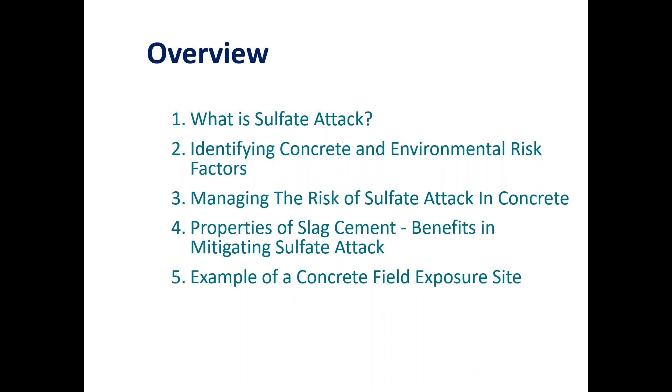I also want to try to help you identify concrete and environmental risk factors, manage the risk of sulfate attack in concrete, and then get into some of the properties of slag cement and some of the benefits of mitigating sulfate attack. I thought it would be good to close with a few examples, specifically some exposure site type of stuff. If you're not familiar with that, I'd like to introduce you to this concept. Next slide.

Okay, so all the time I spent on this presentation trying to unpack the content, to rearrange the content and spell it out clearly, this was probably the slide I struggled with the most.

I looked at various publications, including things from the PCA, the SCA, various professors, industry people, and there is a common theme in sulfate attack, but the definition I thought was best is this sentence you see at the top.

Essentially, it explains sulfate attack as a term used to describe a series of chemical or physical reactions between sulfate ions and the components of hardened concrete, principally the cement paste, caused by exposure of concrete to sulfates and moisture.

But I thought that doesn't really help you understand what it is unless you really pick it apart. So I may get some comments about this, but I thought I'm going to try to create an equation, let's say, where I plug in the various elements required to create sulfate attack.

And the first complication I ran into is that sulfate attack is widely split into two main categories, one being chemical attack and the other being physical attack. So I decided I was going to create two separate equations.

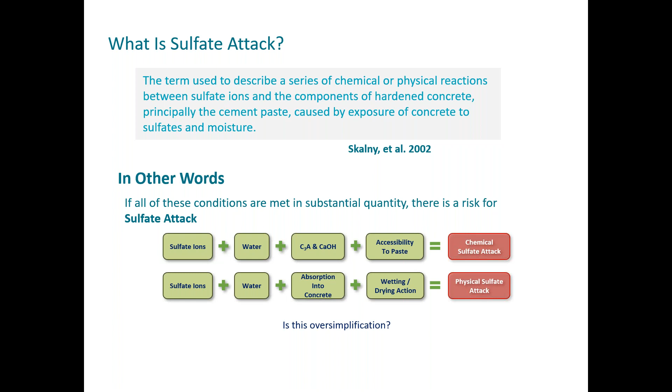But again, I wanted to put this comment in here - is this an oversimplification of sulfate attack? Absolutely. But we could do presentation after presentation on just minute parts of this explanation. So we're going to take a more general approach, and hopefully that is sufficient enough for us to move on with the rest of the presentation.

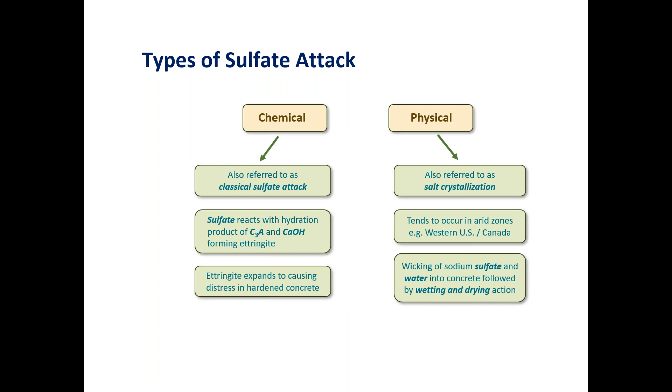I'll emphasize that the word 'physical' only really refers to the action of the attack, but understand there is chemistry involved. There is a chemical reaction involved in physical sulfate attack, but for the purposes of the classic examples, we'll refer to it as physical.

So the other component is, where does the sulfate come from? There are two places sulfate comes from: internal, which we'll cover in this slide along with a little bit explaining DEF, and external, which is the one of primary concern. So when you look at internal sulfate...

Things like oversulfating cements come up. If you're familiar with the process of producing cement, calcium sulfate is added in the milling stage with clinker and other additives to help restrain the aluminate phases of cement from taking over and creating adverse effects like false setting and flash setting.

But when these things are incorporated in high amounts—and I wasn't able to find much documentation of this happening, so I'd assume it has to be in very extreme amounts—with the exception of delayed ettringite formation, you can essentially build in the sulfate source.

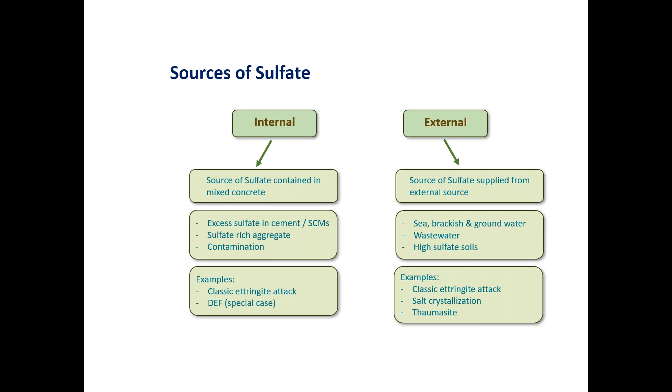So let's establish what it can look like. My favorite is thaumasite—this is the last time I'll mention it, but it deserves an honorable mention. It's a phenomenon that, unless you're in some of the coldest inhabited places on Earth, you're probably not going to see. It has to do with a cold weather, low temperature mechanism that causes this to happen, and it is... an external issue.

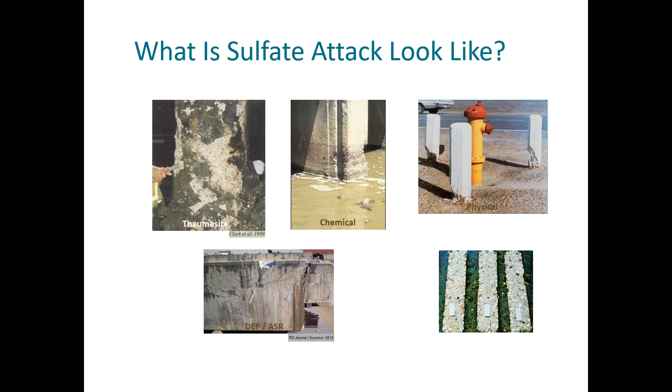Next slide. Okay, so back to our equations. So sulfate ions, and understand that this is strictly, we're going to focus on...

Hey Ryan, this is Drew, I just wanted to chime in for a sec. We got a question: what does DEF stand for?

So DEF stands for delayed ettringite formation, and it's a very widely debated subject, in that even some of the greatest researchers and minds in concrete research can't completely agree on its mechanisms. Ettringite, as I explained earlier, is something that is formed with sulfate, but DEF is essentially just an internal issue, at least as far as I understand, and it only happens in things like mass concrete, or concrete that has been intentionally cured at very high temperatures, in the ranges of 160 degrees or higher. Essentially, it causes, down the road, with the introduction of moisture, this ettringite to form and expand and degrade the concrete. So I hope that answers the question.

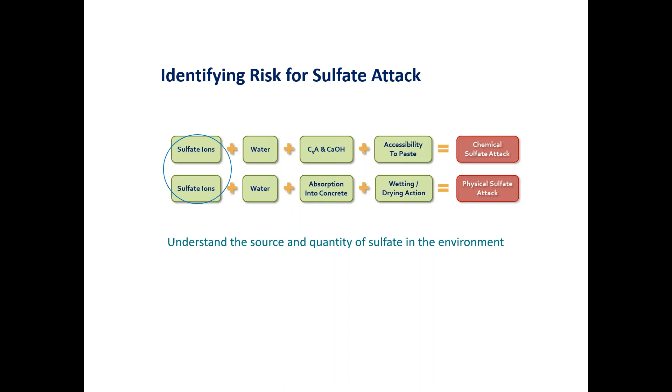So sulfate in soils and water. Soils contain moisture for the most part, and obviously water contains water, so you have sulfate, you have water, so you have the first two ingredients to causing sulfate attack. Here's a simple chart from ACI 318 building code, and what it does is it attempts to classify the severity of risk of sulfate attack. So you have four classes.

I don't know why they didn't start with 1, but S0, I guess it just sounds like there's nothing to worry about, and S0 is exactly that. It's sulfates in the soil by percent mass that are lower than 0.1%, and in water that are less than 150 ppm, parts per million. Then as you go up through, those numbers become larger and larger until you get to S3, which has sulfate by mass - and from what I understand, those conditions can exist. It seems very high, but in certain circumstances it can, and it's the most severe risk. And then sulfates in water at 10,000 parts per million or greater.

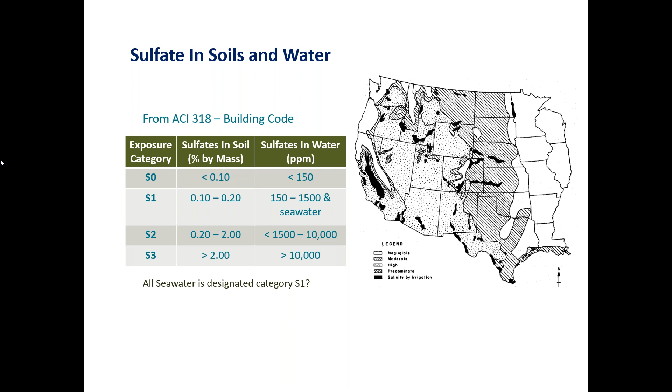Here it is. So this is an interesting case in that you say, well, sulfates are in seawater, and they can be very high in seawater, but we know they're there. And we know that a lot of infrastructure is built around coastal areas in the Atlantic, Pacific, Caribbean, and other places of the world. So why is it that you would only consider seawater in sulfate exposure class 1? The plain and simple answer is that you also have chlorides that you're contending with, and sulfate attack is not necessarily your biggest enemy in this type of seawater concrete environment.

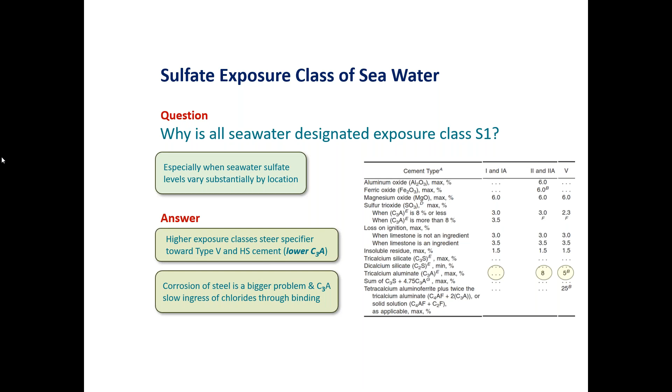Now that we've looked at the source, let's look at the vulnerabilities of concrete mixtures and the materials that we make concrete with to sulfate attack. When looking at this, this is where you start to see in your specification all of that other stuff done sort of on the engineering and design side. They figure all that stuff out, and then they come over to the other side of these last two things and say, all right, we're going to specify something that helps to improve these things, because you can't change a lot of environments. It's just not feasible, but you still have to build concrete structures in them. So, next slide.

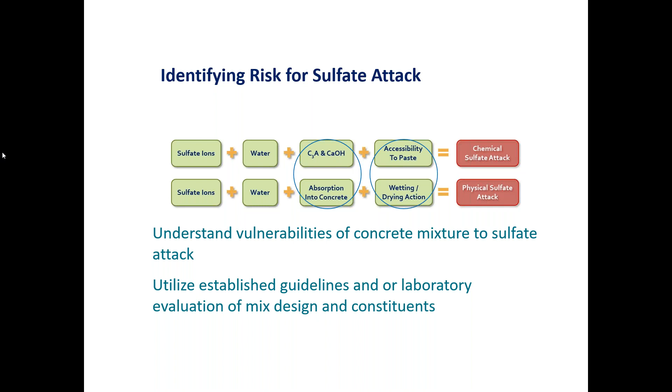So to understand how we can quantify our risk of sulfate attack, and knowing that sulfate attack is something that's pretty much exclusively in the paste portion of our concrete, and a very high amount of this relies upon the cement itself, we'll look at the method of evaluating sulfate expansion potential, or sulfate reaction potential, and that standard is ASTM C1012.

Essentially, what you're going to do, if you've produced or specified concrete, is specify a certain amount of maximum expansion allowed. To meet that, you create mortar bar samples with various combinations of cement, blended cement, pozzolan, slag cement, microsilica, and then soak these in a solution of sulfate, and measure these bars over time. Over time they actually grow, and you'll see some of that data here, and they can grow very substantially, and in a lot of cases these mortar bars can actually crack and break up.

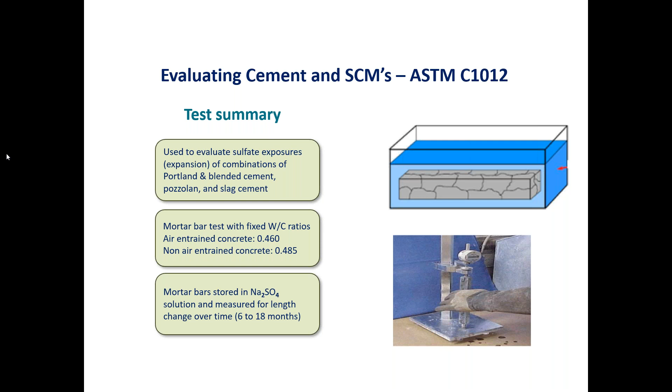So how do you take those results and understand what you're meeting? Because sometimes, let's say on a project, an engineer says we need an exposure class S2. You can utilize this chart that I believe is in the latest version of 318 - the updated version. A lot of you probably haven't seen it; I haven't actually seen it in the standard because I don't have access to it. But anyway, you can see there are a few different mechanisms here.

One is the severity of sulfate exposure, the classes. The other thing moving the requirements is water cement ratio, and as we'll demonstrate later, water cement ratio is paramount in the importance of reducing and mitigating sulfate attack. Then you have your cementing materials, and then you also have your C1012 tests, and you can see as you move through the sulfate exposure classes, you're moving from no requirements to type 5 cement and low water cement ratios.

So class S3, if you have a 0.40 water cement ratio, you've got to use type 5 cement, or you have to use type HS, which you can achieve through either a blended cement - say a slag blended cement, a pozzolan blended cement, or a combination - or you can take your cement, your type 2 cement, your type 5 cement, and blend it with things like fly ash and slag cements and other things, which is very commonly done.

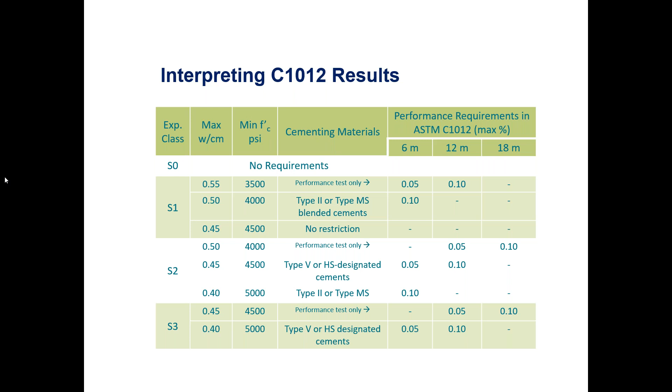Managing the risk of sulfate attack - here are a few common themes of things that are approached when it comes to managing sulfate attack. This is obviously on the premise that you have some sort of sulfate exposure level that's greater than 0.

Reducing the cement C3A content - we said that's a foundational part of sulfate attack. You reduce the C3A, you reduce the amount of hydration product that is highly vulnerable to attack by sulfate, and these are accomplished through things like type 2 cement, type 5 cement use, or moderate sulfate and high sulfate resistant cements, which are a blended spec that meets a performance spec.

Reduction of paste permeability - I say this is probably one of the things everybody sort of understands, and it translates to a lot of different problems in concrete. But the more permeable the paste is, i.e. the more water to cement that was used, the higher the water cement ratio, the more opportunity there is for things that shouldn't be in concrete to get into hardened concrete. So managing water cement ratios, specifying proper water cement ratios, is very critical.

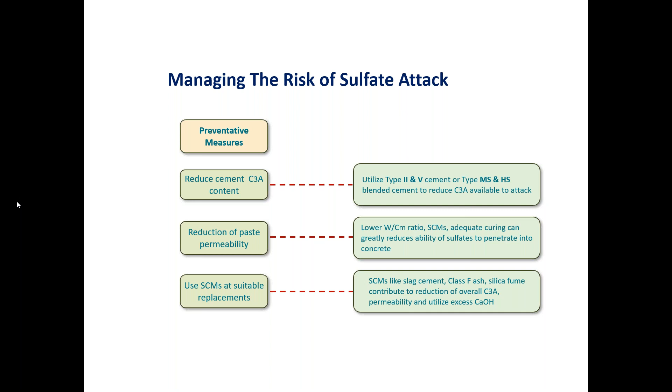So here's an example of a situation where adding SCMs is actually detrimental. In certain areas of the country, there are a lot of Class C fly ashes. And I don't want to say Class C fly ash is bad, but I want to say that it doesn't necessarily solve durability problems, specifically with regard to sulfate attack.

There's an established breaking point, and it has to do with the calcium oxide content. As you move from Class F fly ashes, which can have calcium oxide contents of 2 and 3% and higher, you move into that 18% threshold you're getting into Class C fly ashes, and they have less pozzolanic reaction and more cementitious or cementing reaction.

So Class C fly ash will actually react. Class F fly ash, you can add water to it, and it does nothing. It needs certain things to activate it, like free lime and soluble alkali and things of that nature.

That's why that test is important, especially in an environment where Class F fly ash, and even quality sources of Class F fly ash, are becoming very irregular. The supply is. If you have a project where sulfate resistance is important, don't swap Class F ash for Class C ash. It's a good opportunity for you to go back and look at the Class C fly ash, because you can use it as long as you demonstrate that it is suitable for mitigating sulfate attack.

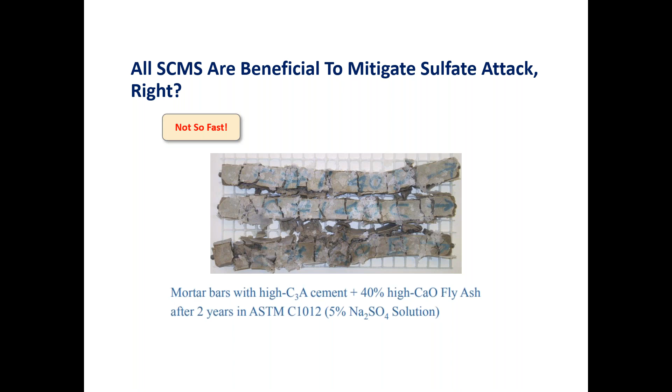Okay, we touched on water cement ratio. This is a fairly drastic contrast when it comes to the effect of water cement ratio on sulfate attack. But I promise you that even with tighter bands, say 0.4, 0.45, 0.5, you can see very substantial differences in the effect of sulfate attack based on water cement ratio. And again, that plays into the permeability of concrete.

So here are field exposure concrete samples made with type 5 cement. One used a 0.38, and one used a 0.65, and essentially everything else is the same. This is actually in Sacramento, an exposure study I believe done by PCA years ago. This is 12 years of exposure, and you can tell there is a substantial difference in the integrity of these concretes based only on the water cement ratio being different. So it's a big important factor.

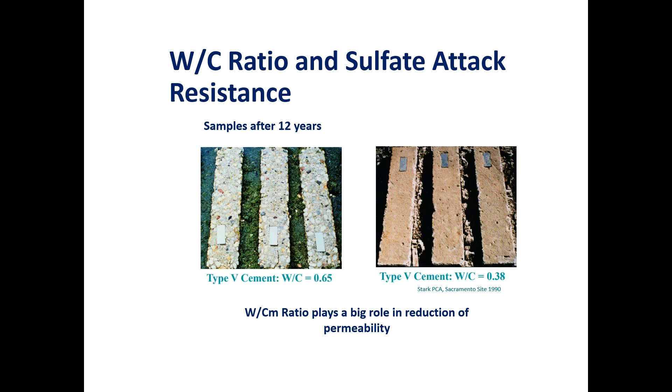Okay, I said we were going to do it, so let's do it. We have delayed ettringite formation, and again, I don't want to scare anybody off. I have been a producer of concrete for many years, as well as somebody who services and supplies cement to concrete producers, and I have yet to have one of these problems come up, or if it has, it has not been identified as DEF.

But again, delayed ettringite formation is a late formation of ettringite, and it essentially happens when you have initial curing temperatures in excess of 158 degrees. Now that's for an OPC, an ordinary Portland cement type mix.

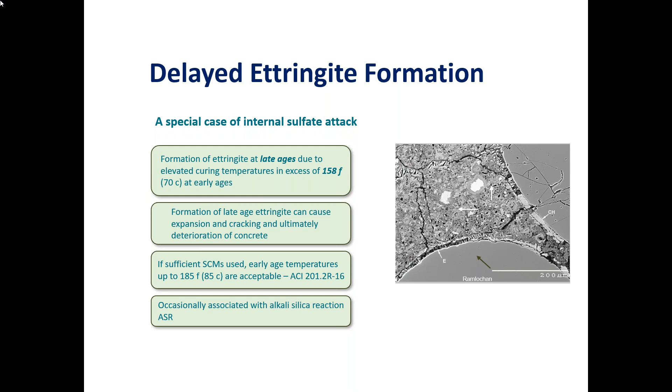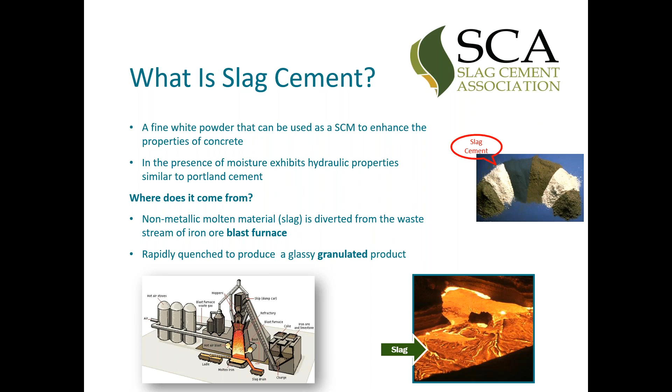Next slide. Interestingly, this handful of material this person is holding is what slag cement looks like before it's ground. So it's not white before grinding, but after it's ground, it becomes white. If you look at a microscopic view of slag cement, you can see that it's angular, with different particle sizes, typically slightly finer than Portland cement. If you look at this mill to the right, the grinding facility, that's a pretty standard mill, the same exact type of equipment you'd find at a cement plant with a ball mill or roller mill - ground on the same type of equipment you'd use to grind cement.

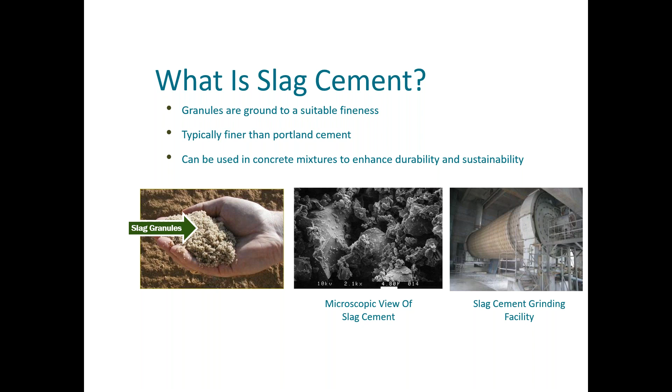Whoa, that didn't come out right. Okay. It's okay, Drew, so we're going to have to use our imaginations here a little bit, but sorry, Ryan, I can pull up the original slide for this too. Hang on just a second. No worries. So what this is, I think it's a wonderful illustration if it was fully colored in, but apparently it didn't make it in the translation.

But you can see that light area that says aggregate - imagine there's an aggregate particle there, and you're looking at two different systems: a system where the paste is comprised of only Portland cement, or at least the powder component is only Portland cement, and then a Portland cement and slag system. What you see is these gray particles represent cement particles, and the yellow coatings around them represent the hydration product, the reaction product from the hydration process, called calcium silicate hydrate, or CSH.

Then what you end up with is obviously these microscopic voids, and in this case they're very large, but I promise it's more dense than it seems - this isn't as dramatic as it appears. When you look at the difference between the slag cement matrix system and the Portland cement system, you notice there are far fewer voids because the slag cement has essentially - there we go, perfect, now this is a little better representation, so you can kind of see what I'm talking about. Obviously this is an over-dramatized version of what happens, not accurate to scale or anything like that.

But the idea is that calcium silicate hydrate we talked about - the free lime that's not used in the cement hydration process - is actually beneficiated by slag cement, which helps create additional hydration product. So what you end up with is a less porous pore structure in your paste. Again, why is that important? It's important because preventing things from entering into concrete is a big part of preventing destructive mechanisms that cause concrete to fall apart. So that's all I have on that slide, Drew.

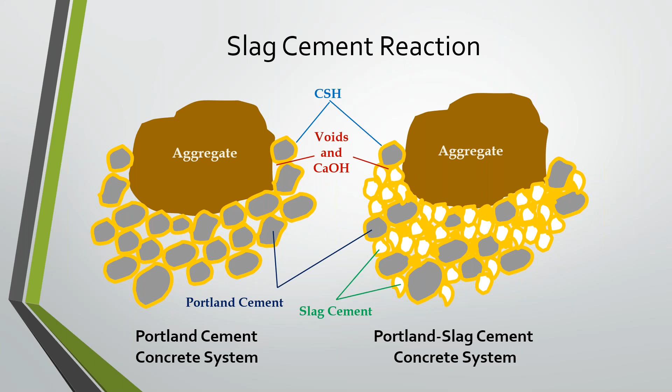So, permeability - if you've ever used slag cement, or if you've ever been required to meet low permeability, I recommend that you consider slag where it's available, because it's by far one of the best products that can be used. I'll say that maybe outside of microsilica, but if you've ever actually tried to produce that via ready mix concrete, you would understand the challenges. It's not a very friendly product to work with, not a friendly product to place. There's difficulties in pumping, placing, and consolidating. But slag cement, considering that it does not have a drastic impact on the plastic properties of concrete, is a fantastic way to reduce permeability.

And the big thing about it is there's been a sort of mindset change in the specifying community regarding the rapid chloride permeability test, which you're seeing here is sort of a setup of the apparatus and the cells.

The curing age on the concrete would be 28 days, but inevitably you miss some of the benefit of slag cement, especially at replacement levels of 40, 50, 60%. It's probably more realistic anyway that over a period of time a concrete structure will continue to cure, as long as it's provided with a moist environment and reasonable temperatures. It should cure out past 28 days worth of effective curing.

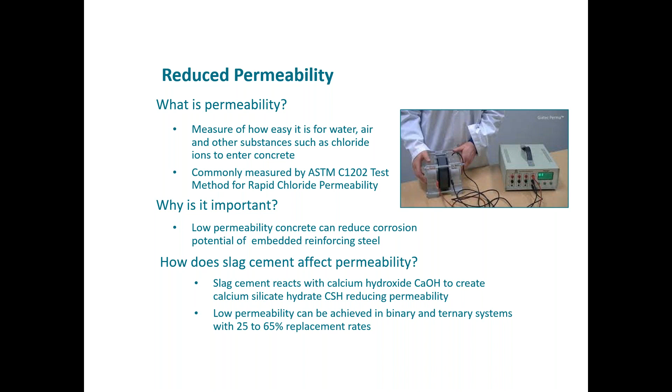I hope I'm not confusing this with other types of permeability, because there are other methods, but it's still a good indicator of how permeable concrete is, even if its main intent is to understand how permeable concrete is for chlorides. Next slide.

Okay, now to the expansion chart. So we talked about the C1012 tests - these are mortar bars measured over time, and usually that time is 6, 12, or 18 months.

There are a lot of long-term studies measuring these things out over years if the samples are surviving. Essentially what you're looking at is a scenario where you have an ordinary Portland cement, represented by that brownish-greenish line, and then two scenarios of slag cement replacement. You can see the specification limit - in this case against a 1-year limit and a half-year, or 180 day, limit. You can see that even the introduction of 25% slag cement gives a substantial reduction in the expansion due to sulfate, because you have less of the C3A component, lower permeability, and other things driving that expansion rate down.

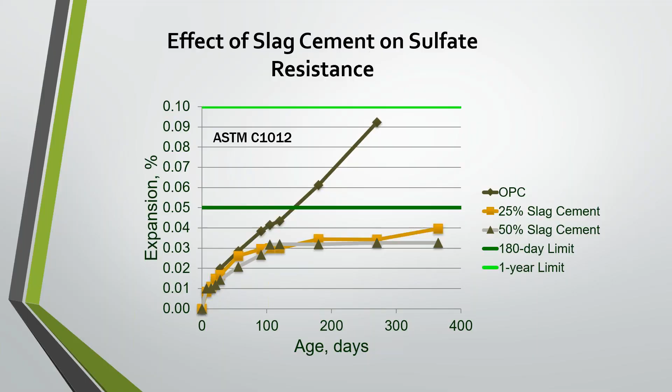This is something done at the University of Toronto using type 3 cement. Type 3 cement is known for being fine ground, and a lot of times it can have high C3A - I don't know about this particular cement. It creates a lot of heat of hydration very early. We grind it fine and select chemistry to solicit very early reaction, because in some environments like precast concrete and post-tension construction, time is very critical.

So you look at these mortar bar samples that were created - they cured them at 203 degrees. Remember we said earlier 158 degrees is considered the critical point for say an OPC mix, and 185 degrees is for a mix with SCMs.

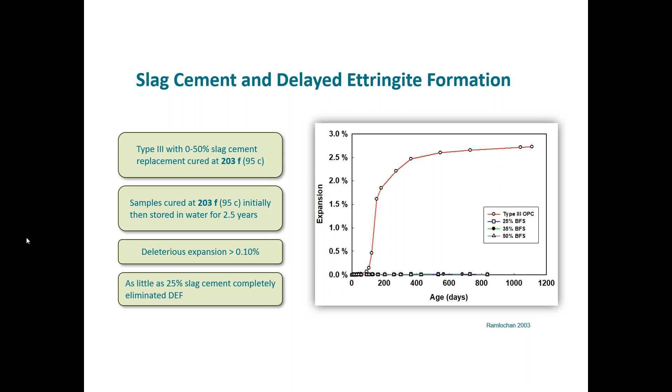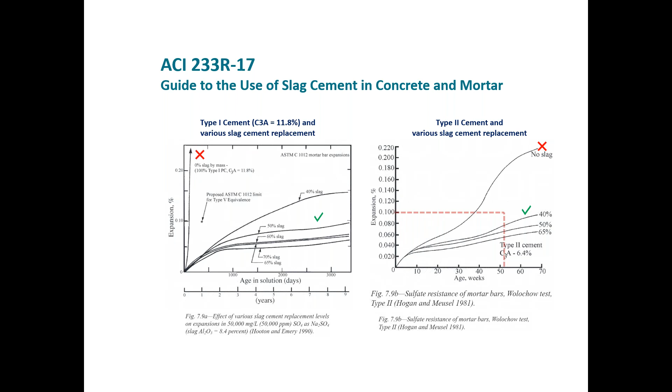Here's another good example. People say, well, I can't find type 5 cement. It's hard to come by in some places, especially east of the Mississippi. There are producers that supply it, but it's usually in limited quantity and someplace you don't want to go to get it because of haul rates and things of that nature.

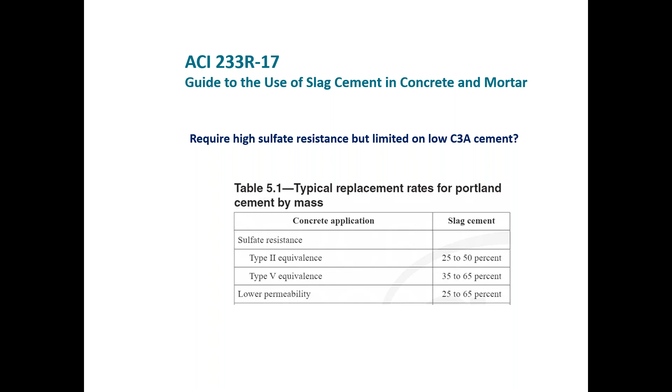So they made these samples, buried them in the ground, manipulated the sulfate levels, then pulled these things out and visually inspected them. So next slide.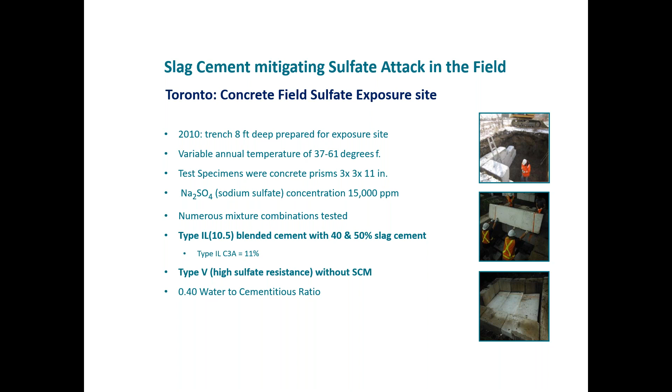What I wanted to reinforce is that essentially what you see is what they observed after 33 months: minor damage for all of the samples except for one. The two type 5 samples had minor damage in the sulfate environment. The IL with 40% slag had minor damage too, so it was very comparable.

The IL cement—I should explain—is a blended cement with limestone, and the 10.5 represents the amount of non-calcined limestone. It's an addition to the finish mill.

But at 50% replacement of slag, it actually performed better within this 33-month time period than the type 5 cement. So that's a very impressive example.

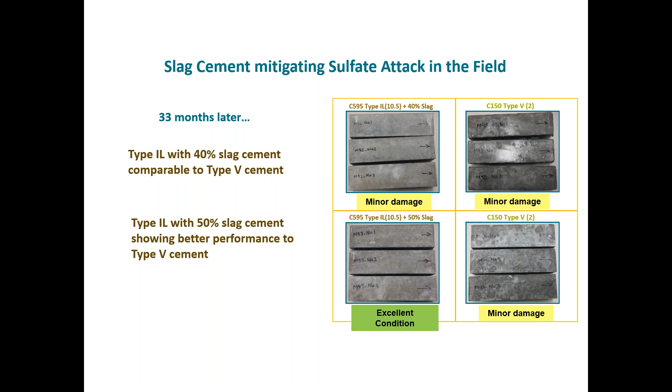So next slide. I think this is my last one. I know we're running a minute over, but if 33 months isn't enough for you—now this isn't a field exposure, but I thought this was a great way to end this discussion—in that what can slag cement do over the long term for durability?

You're looking at, starting at the bottom, an MS cement—a moderate sulfate cement, the equivalent of a type 2 at a 0.5 water cement ratio. Then an HS, equivalent of a type 5. And then a GU cement—I meant to incorporate the notes—but you're talking about a GU cement that has something like far above 8% tricalcium aluminate.

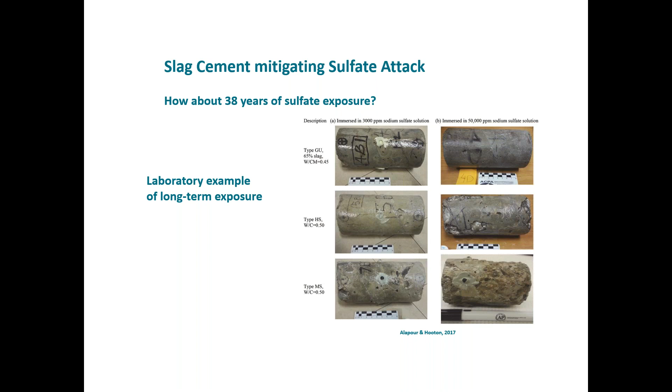I believe for this one it was like 11.5%, so it's very high by typical standards for general use cement. But with 65% slag cement at a 0.45 water cement ratio, after 38 years in 2 different sulfate solutions, it's by far the best looking concrete. If you want to know whether slag cement helps mitigate sulfate, not just in the short term but over time, I think this is a fantastic example of the potential that slag cement has for creating long-term durable concrete. That is the conclusion of my presentation.